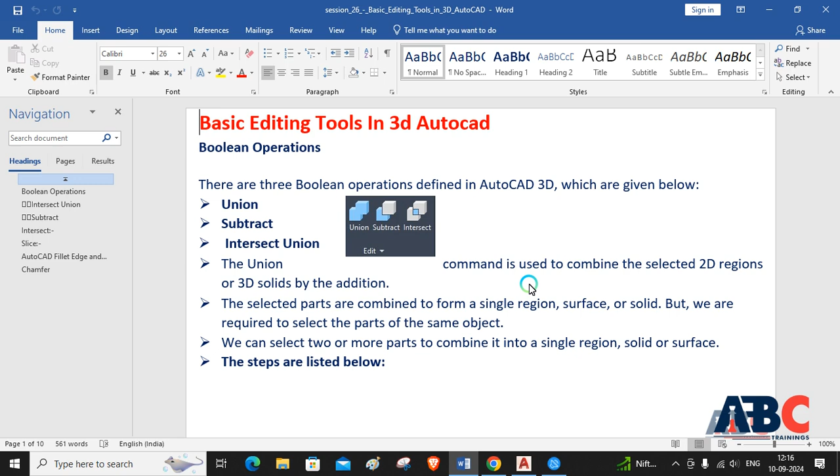The union command is used to combine the selected 2D regions or 3D solids by addition. The selected parts are combined to form a single region, surface, or solid, but we are required to select parts of the same objects. We can select two or more parts to combine into a single region, solid, or surface.

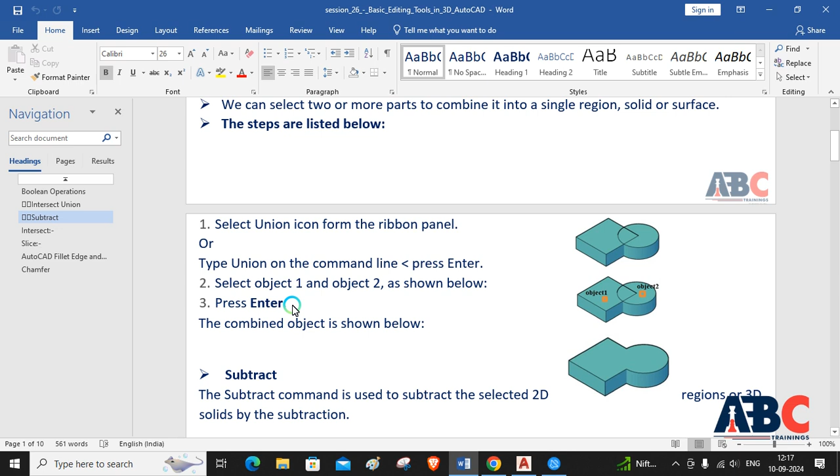Steps are listed below: select the union icon from the ribbon panel or type union on the command line, press enter, select object 1 and object 2 as shown below, press enter. The combined object is shown below.

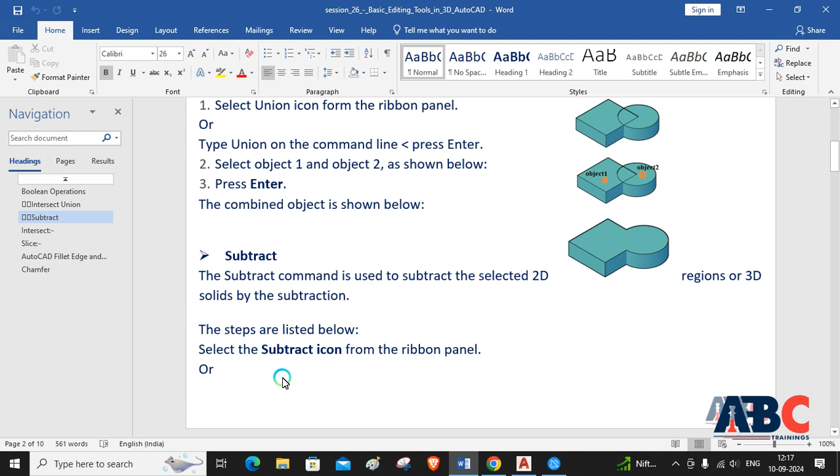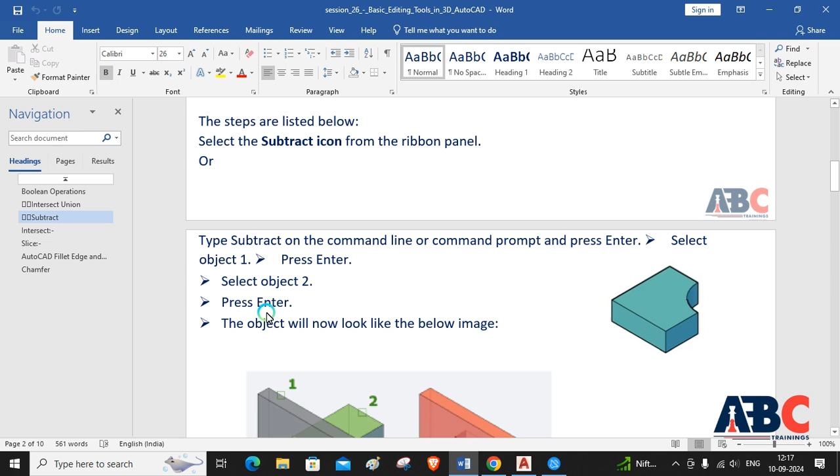Subtract. The subtract command is used to subtract the selected solids by subtraction. Steps: select the subtract icon from the ribbon panel or type subtract on the command line and press enter. Select object 1, press enter. Select object 2, press enter. The object will now look like the image shown. This is how subtraction has been done, by selecting the first object and subtracting another object from it using the subtract command.

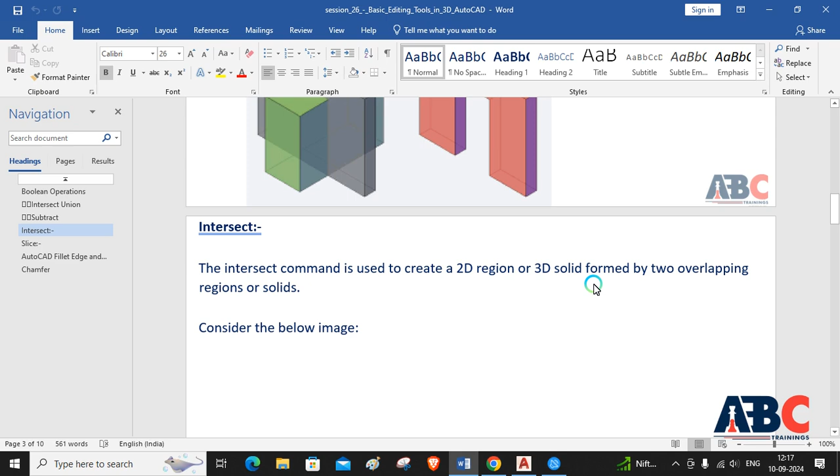Intersect. The intersect command is used to create a 2D region or 3D solid formed by two overlapping regions or solids. Consider the image below - this is the intersect result.

Now let us understand with an example. The steps are listed below: select the intersect icon from the ribbon panel or type intersect on the command line and press enter. Select object 1 and object 2 and press enter.

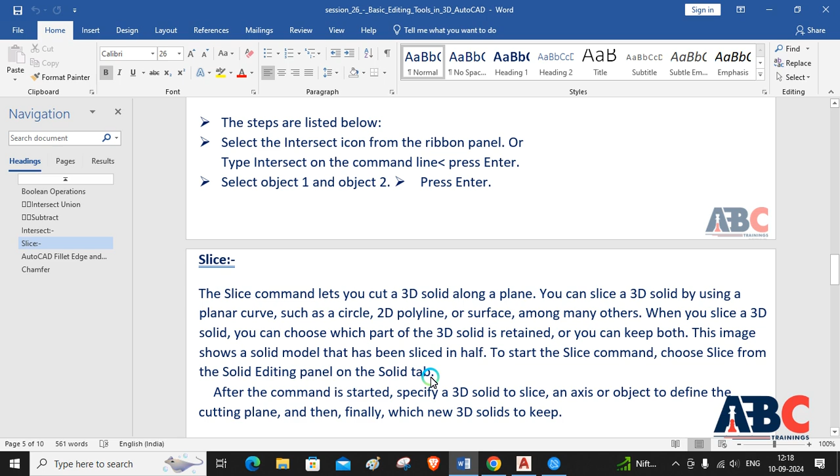Slice. The slice command lets you cut a 3D solid along a plane. When you slice a 3D solid using a planar curve such as a circle or 2D polyline curve, among others, you can choose which part of the 3D solid is retained, or keep both. This image shows a solid model that has been sliced in half.

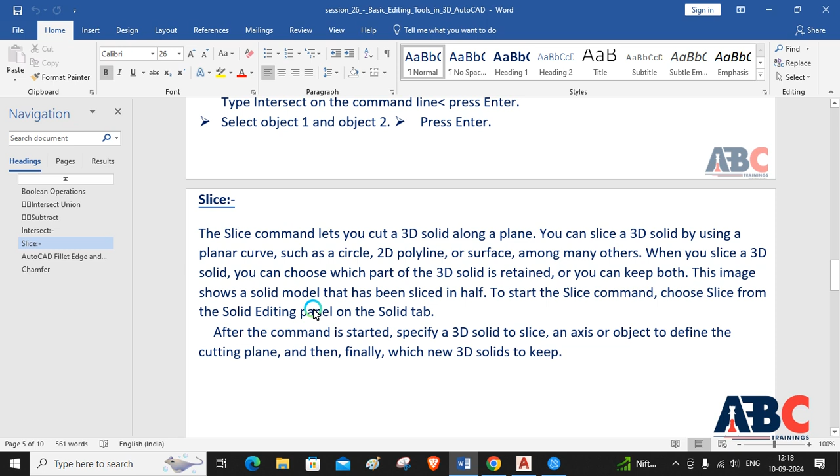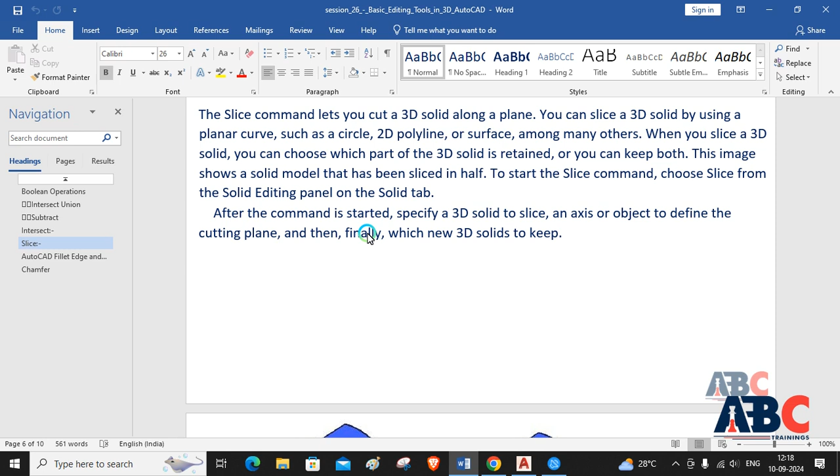To use the slice command, choose slice from the solid editing panel on the solid tab. After the command is started, specify a 3D solid to slice, an axis or object to define the cutting plane, and finally which new 3D solids to keep.

AutoCAD fillet edge and chamfer in 3D. Fillet edge: the fillet command in 3D is used to create smooth edges. Consider the images below. The steps are listed below.

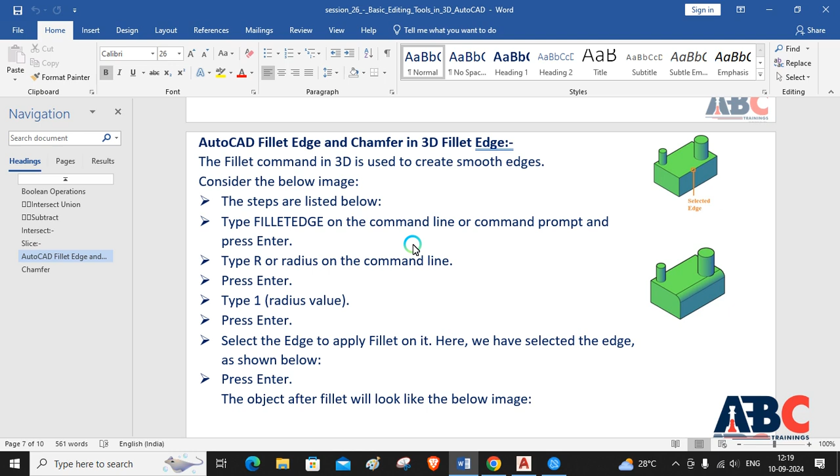Type fillet edge on the command line or command prompt and press enter. Type R or radius on the command line, press enter. Type the radius value, press enter. Select the edge to apply fillet on - here we have selected the edge as shown below. Press enter. The object after fillet will look like the below image.

The chamfer command in AutoCAD is used to create slanted edges. Let's understand with an example. The steps are listed below.

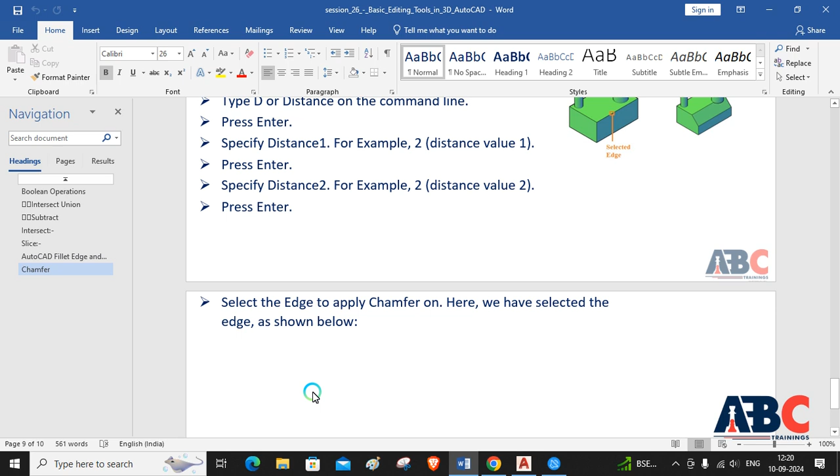Type chamfer edge on the command line or command prompt and press enter. Type D or distance on the command line, press enter. Specify distance 1, for example distance value 1, press enter. Specify distance 2, for example distance value 2, press enter. Select the edge to apply chamfer on - here we have selected the edges as shown below. This is the chamfer edge.

Now we will see this in AutoCAD. I have drawn this box, a 100 by 100 cube. Now I will show you the chamfer command.

First go into solid, chamfer edge. First select the distance. Give distance as 40, any distance, and another distance as 50, and select the edge. This is how chamfer applies.

Now control Z to undo. If I select distance as 10 mm and the second distance also as 10 mm, and if I select loop, then I can select the edge. If I don't want this face, I can select another face by using the next command. This is how the next face gets selected, and I can accept.

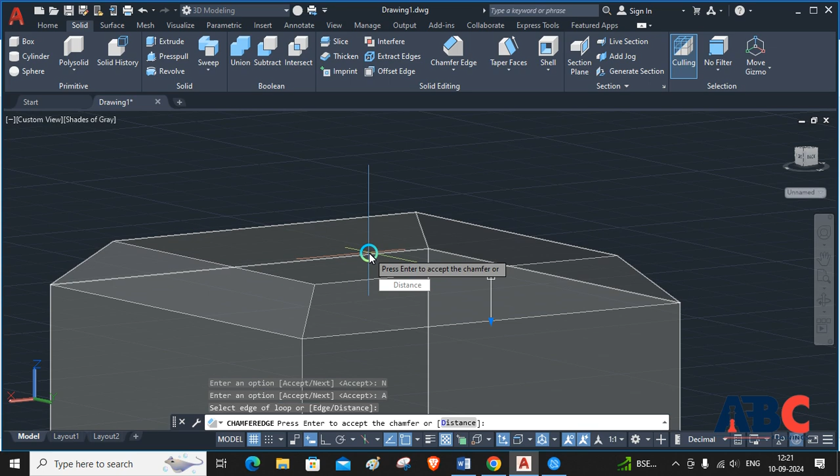This is how chamfer gets done. We use chamfer or fillet to avoid sharp corners and for reducing stress concentration.

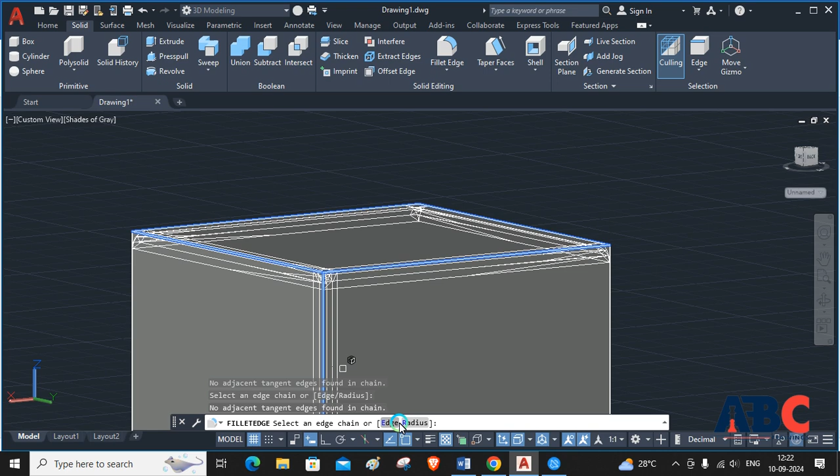Now I will be showing the fillet command. In chain mode, I can select the number of edges I want, any edge, and keep the radius. I can give radius as 20. Enter. This is how fillet occurs.

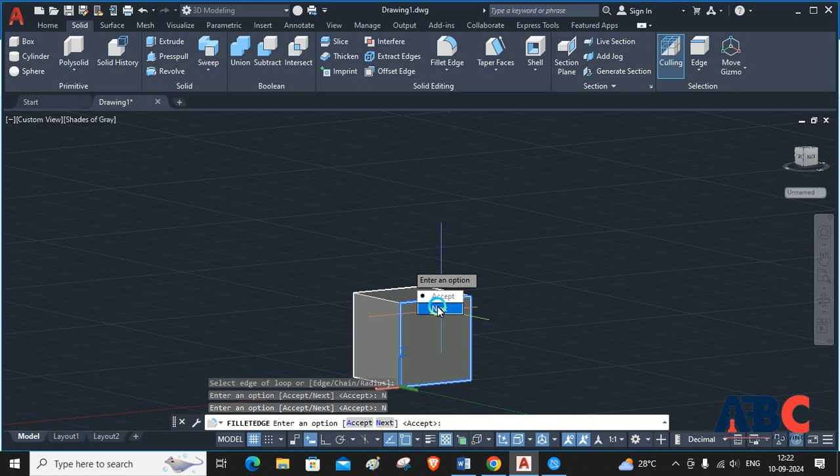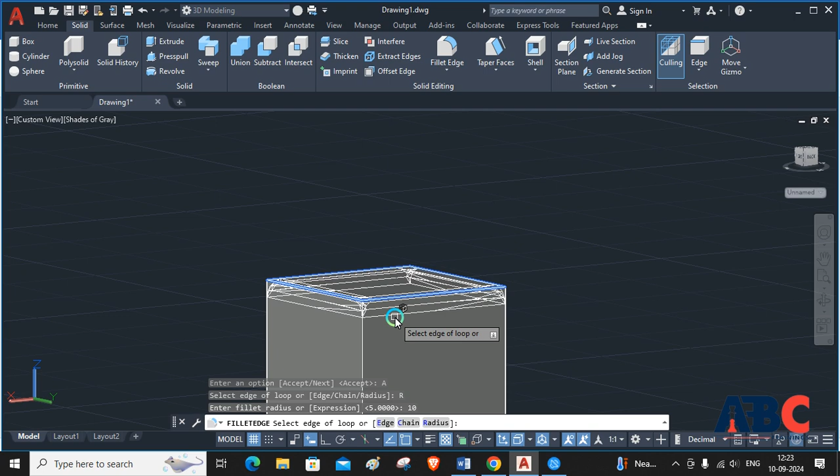Now in loop mode, similar to chamfer, we can select the edge and the face gets selected. Accept. Radius as 10 mm. This is how the whole face loop gets selected, and this is how loop fillet has been given. Enter. This is how it looks like as a fillet edge.

I can show you by rotating it - the whole face gets filleted.

Now I will be drawing a cylinder.

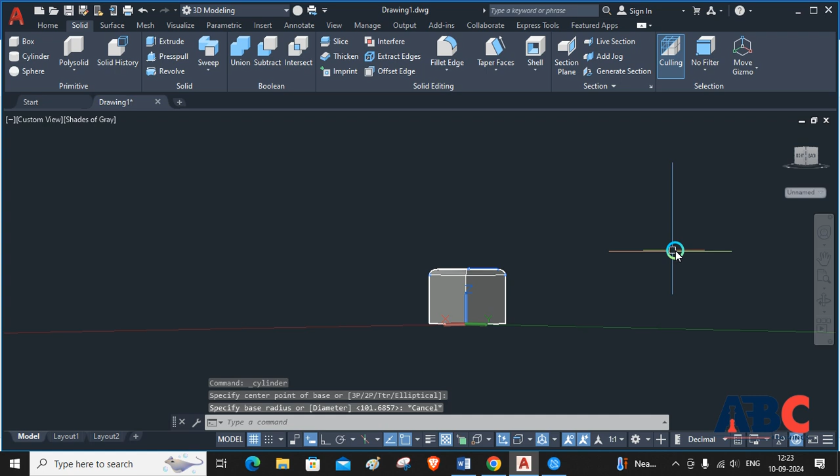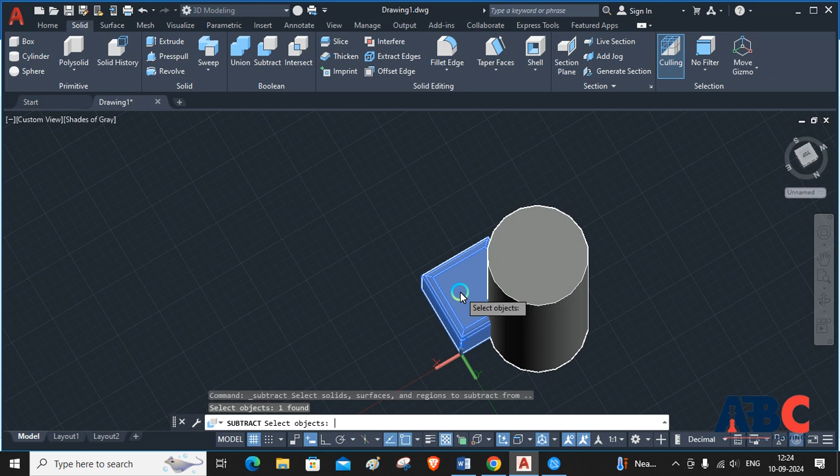Now I will be showing you Boolean operations. Like first is subtract - I want to subtract this cylinder from this cube. So I will be selecting first the cube, enter, and then the cylinder, enter. This is how the subtract command is used.

Control Z to undo. Now intersect - I will be selecting both the objects and enter. This is how intersect works.

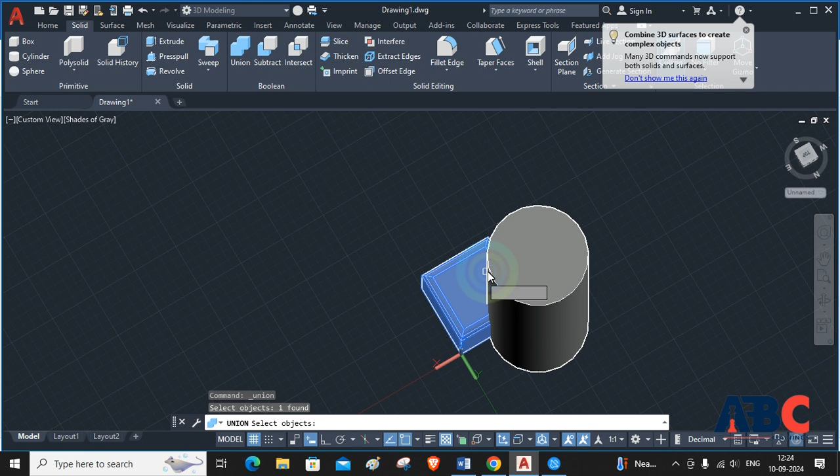Control Z. Now if this object is different and this object is different, I want to get them as one object only, so I will be using the union command. I will be selecting this object and pressing enter. So now the whole object gets selected - if I select one object, both objects get selected simultaneously. This is how the union command is used.